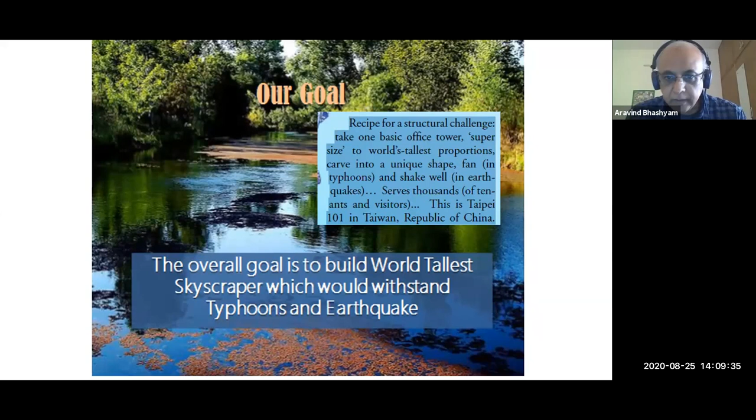So what was the goal of this, basically? If you look at it, the overall goal when we started this was that it was not supposed to be the tallest skyscraper. But over a period of time, that idea got into the people interested in building this, and so it became the world's tallest skyscraper. They also wanted a multi-level shopping mall adjoining the tower, with a lot of tower houses, hundreds of stores, restaurants, and clubs. This is basically just giving you an idea about the building.

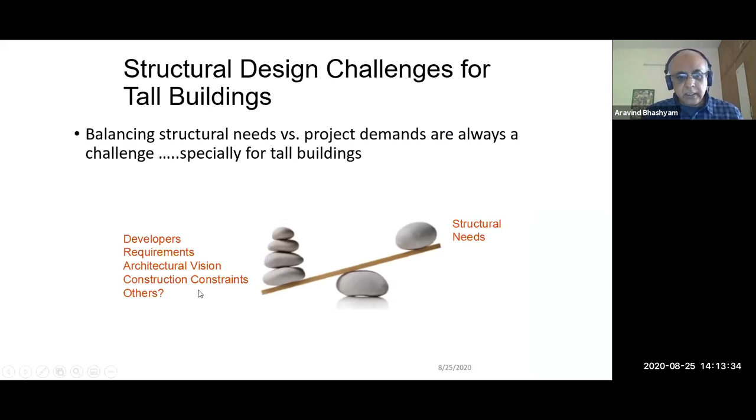Now, the challenges we face here are that you have the structural need, plus you have to meet the demand. So if you look at the developer requirements, architectural vision, construction constraints, and others, we need to balance that. How am I going to balance that? Especially when it comes to tall structures, you have the structural need on one side and the requirement on the other. How am I going to balance it?

So the challenge that you have here is the premium for height. If you have a short building, generally strength governs the design, and the gravity load is the one which is more predominant.

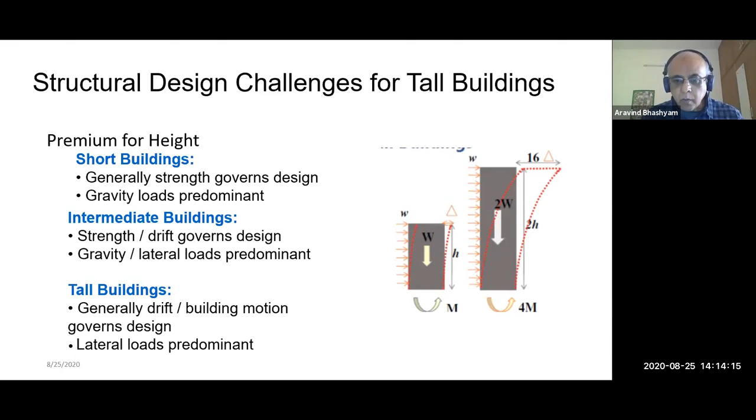For an intermediate height of building, strength and drift both govern the design. Both gravity load and lateral load become predominant. But when it comes to tall buildings, drift and building motion become very important, as does the lateral load, so we need to govern that. As the height increases, the moment at the base also increases, and so does the drift.

Now if you look at Taipei 101, here are the basic details. Architect is CY Lee and Partners, structural design done by Thornton and Tomasetti Engineers. It is steel, in-situ concrete and glass, basically a composite structure. It started in June 1998 and finished in December 2004. Total height is 508 meters, number of floors is 101, plan area 50 by 50, cost is 700 million, an office complex with a parking area.

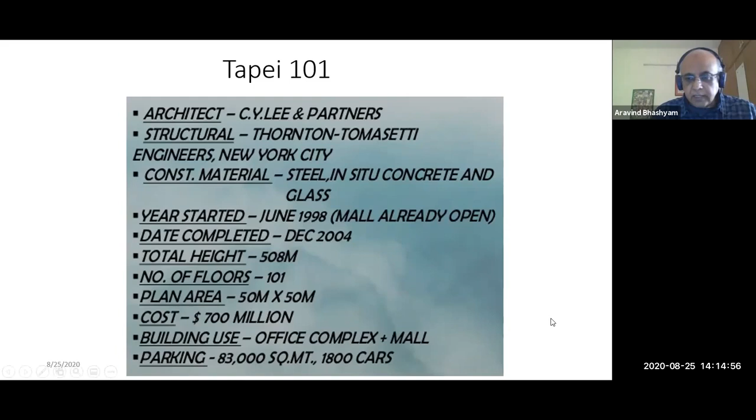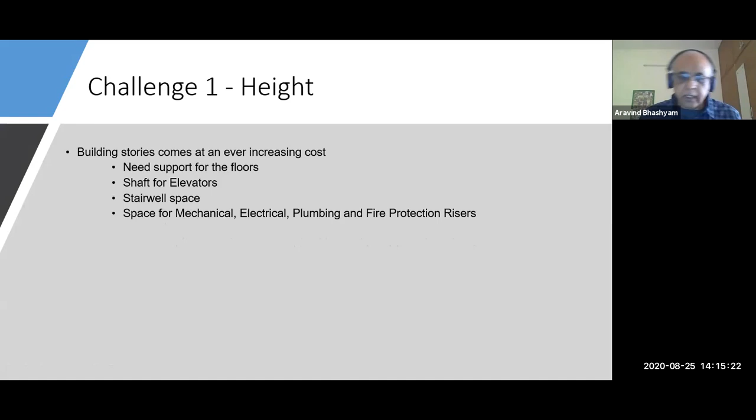The first challenge was the height. You need to find a way to support the floors, decide where to locate the shaft for the elevators and the stair space, and also find space for the mechanical, electrical, plumbing, and fire protection systems, all the MEP. When you look at economic height, the rent brought in by the added floor should be greater than the cost of the added floor.

Prior to Taipei 101, there was the 85-story T&C Tower in Kaohsiung, Taiwan, still standing, which was the tallest building on the island. They wanted to build something taller than this, a requirement from the project investors and also from the financial firm. That resulted in a jump in the height of the building, so what was originally not planned as the tallest tower became the tallest tower, with office space of 200,000 square meters based on individual area and general office layout. They also wanted a podium of the same area, 200,000 square meters, surrounding retail space, and a basement parking.

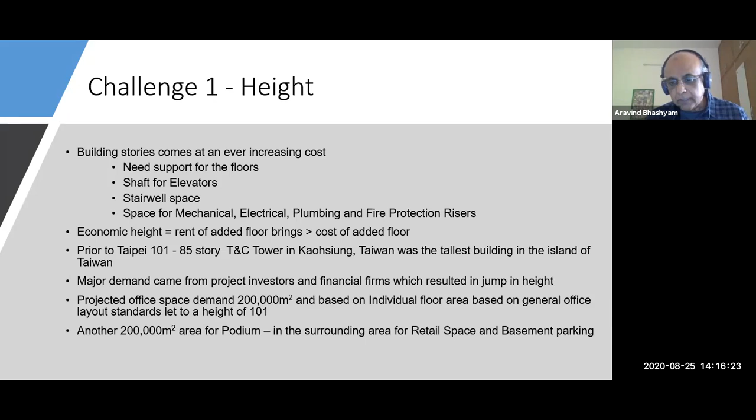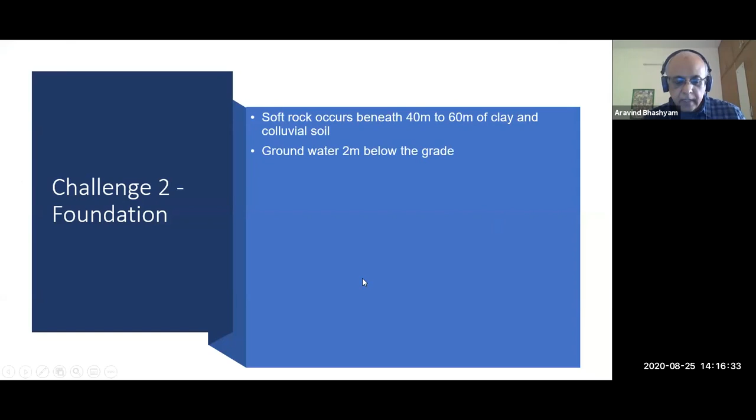The second challenge was the foundation. It's a soft rock that occurs beneath 40 to 60 meters of clay and colluvial soil. The groundwater is about 2 meters below grade. Based on extensive investigation carried out by a geotechnical firm based in Taiwan, they suggested...

...that a slurry wall 1.2 meters thick would surround both towers and the podium, about 47 meters in depth. Each podium is also based on single piles of 2 meter diameter, drilled and socketed 5 to 28 meters into the bedrock, so that it can resist the uplift pressure and buoyancy effect, because the water level is quite high there. You need that kind of dead weight on it to resist the buoyancy.

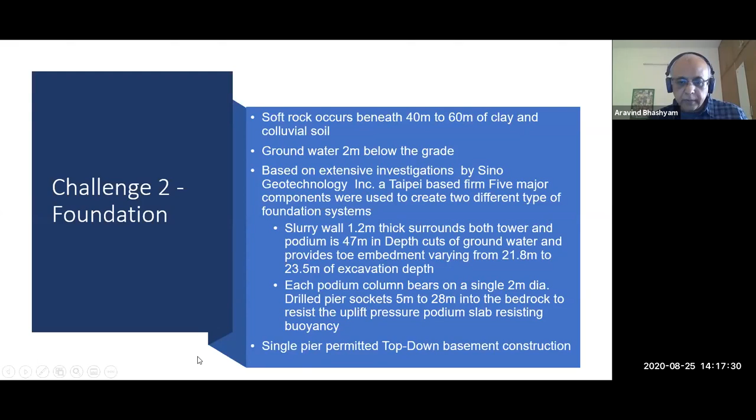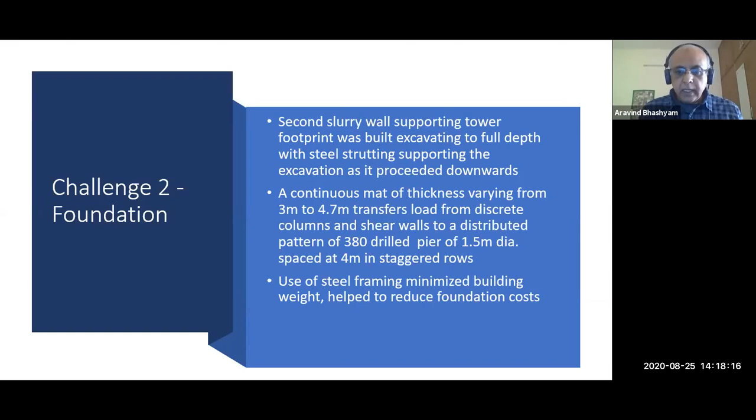We used single piers. I'll come down to the point of why we adopted top-down construction. The slurry wall that supports it was excavated to full depth with steel strutting. Basically, to retain the soil, so that when you excavate into the ground, the soil slope, which is not stable, needs some type of support - it can't stand a vertical cut. So it's all supported with the help of steel strutting, like a beam which spans between the two walls. A continuous thick mat of about 3 to 4.7 meters was used to transfer the load from the discrete columns and shear walls in a distributed pattern to the 380 drill piers. We used a steel framing system in order to minimize the weight.

Now, what is top-down construction? Usually, most cases are bottom-up: you build the foundation, and from the foundation comes the columns, beams, etc. But here it's reversed - you build everything at the top first, and from the top you go down to the bottom.

This decision of using the top-down construction all depends upon the constraints of the site and also the methodology that you feel you can adopt to deliver it much faster. So that was the reason.

So the floor was cast to brace the perimeter wall, and excavation was carried out beneath the slab to support that, and then the superstructure framing was also erected. We could do both top-down and bottom-up construction.

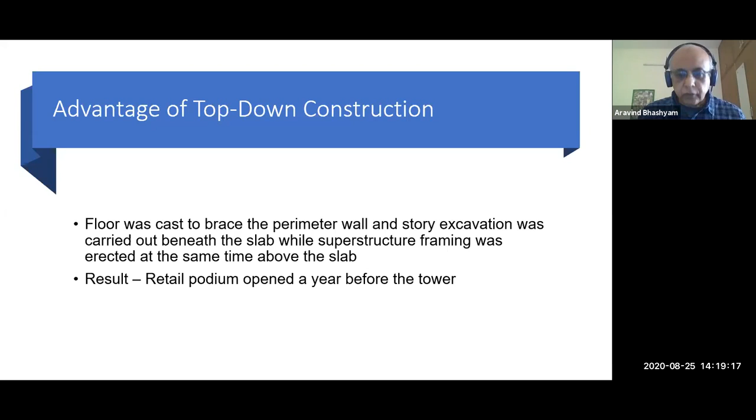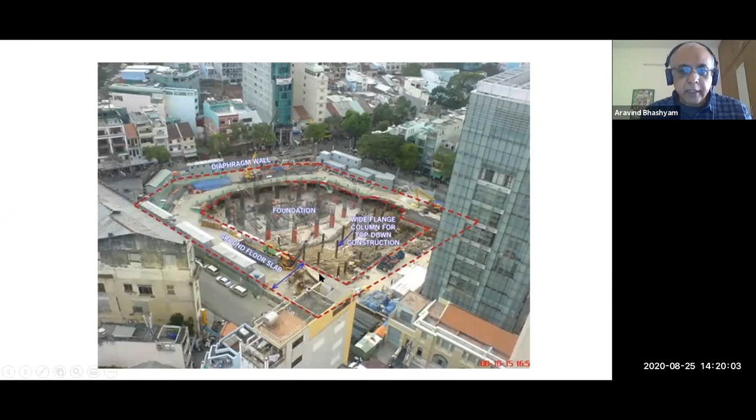Now let's see, can this go down further? Basically, this gives you an idea about the type of foundation that we have. This is a sketch of the foundation since I don't have a photograph, where you have the tower and the podium. You can see this is 380 piles of 1.5-meter diameter, and here about 167 piles of 2-meter diameter.

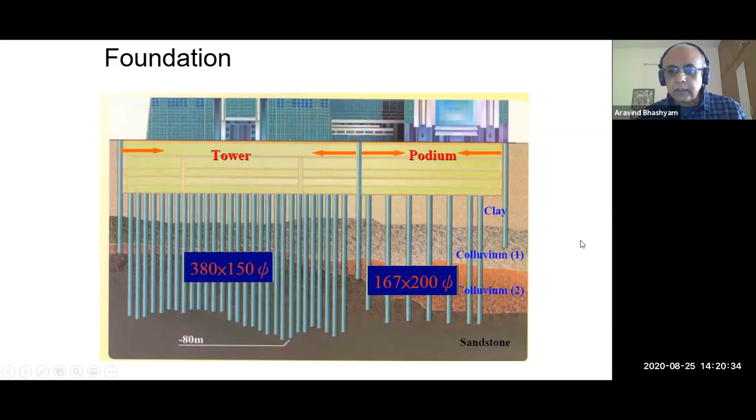We have clay, colluvium, and soil. Underneath you have sandstone, and then it is embedded into rock. This is the kind of foundation that we have, and this is the foundation plan of this whole thing.

Then next comes your tower shape. What could be the shape? Generally this is done by the architect, so the architect comes up with the shape of the building.

Initially, the Taipei 101 became a symbol of Taiwan. It has repeating modules resembling a bamboo in a way, with tiers of pagodas. Initially, that's how it was planned. Each module has a narrow base and a wider top, as if a flower is opening into the sky.

This has 8 modules because 8 is a very holy number to the Chinese, synonymous with wealth. The ninth module is the main shaft, supposed to be the architectural spire, and it has a smaller footprint comparatively. Below that, you have the repeated flare modules.

The first 25 stories are shaped as a truncated pyramid, and it provides the necessary overturning resistance and lateral stiffness compared to a straight shaft. That's the reason why you have that, and it engages the perimeter column.

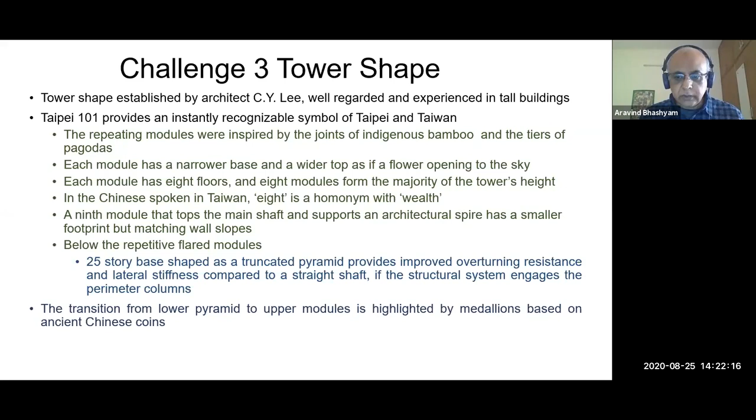Then you have this transition from the lower pyramid to the upper module, highlighted by the medallion based on the Chinese coins.

Now this was the original configuration that we had, like a pagoda placed one above the other, with 8 modules. Now look at the bamboo, how it has a node which expands here—these are the connectivity windows. So the natural formation of bamboo reveals that it has certain unique structural characteristics.

Probably you would have listened to Dr. Jagadish Vengala's lecture on bamboo. This is exactly what it does—it has a long, narrow bamboo stem that provides support for large foliage, and it provides predictable support.

So we looked at it and got an idea—why can't it be like a bamboo? So even when these things are subjected to tsunamis or typhoons, they're able to bear the lateral load efficiently. That's the beauty of this. And the geometric proportions of it are also very nice, so we can take a lot of things from the bamboo.

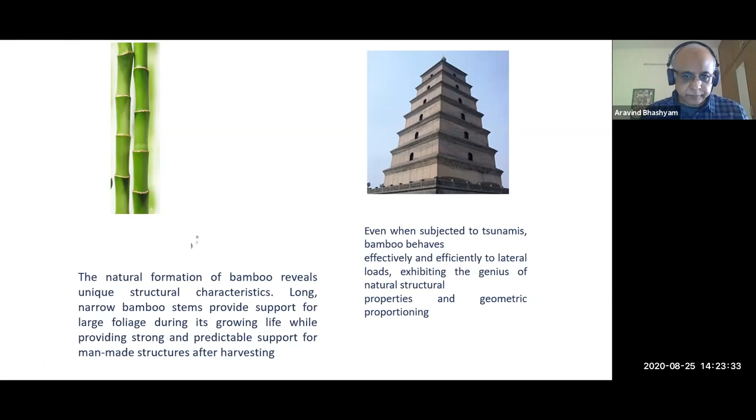So now if you look at Taipei 101, it exactly replicates this kind of feature that you find in a bamboo. Now let's see what this means.

Now if you look at the wind force, that dominating lateral force, you have it in three mutual directions. One on the upward axis is called yawing, that is the lift. Second is the pitching, and third the rolling. These are the three rotations about the three axes that you have.

Now for civil engineering structures, the moment corresponding to the vertical axis—the lift and yawing moment—are of little significance. We need to look at pitching and rolling. Therefore, the flow of wind is considered two-dimensional, along-wind and across-wind, called the along-wind response and the transverse wind response.

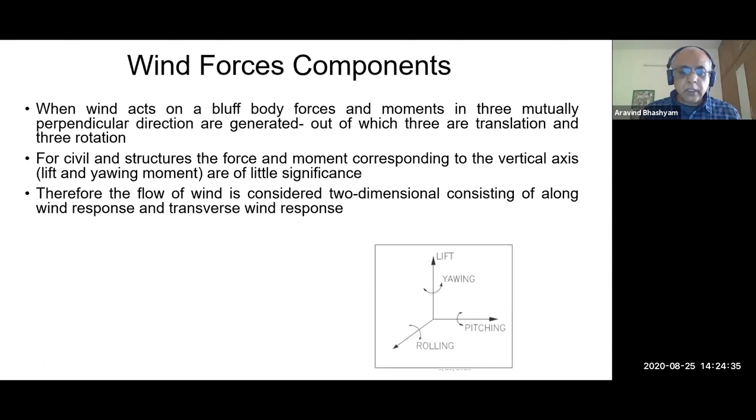So this is exactly where you find the drag force, and the transverse wind is used to describe the crosswind. If you look at the effect of wind on the structure, it has static, dynamic, and aerodynamic effects. We are more interested in the dynamic response of the wind, which is dynamic as well as aerodynamic effect, that should be analyzed in addition to the static wind force.

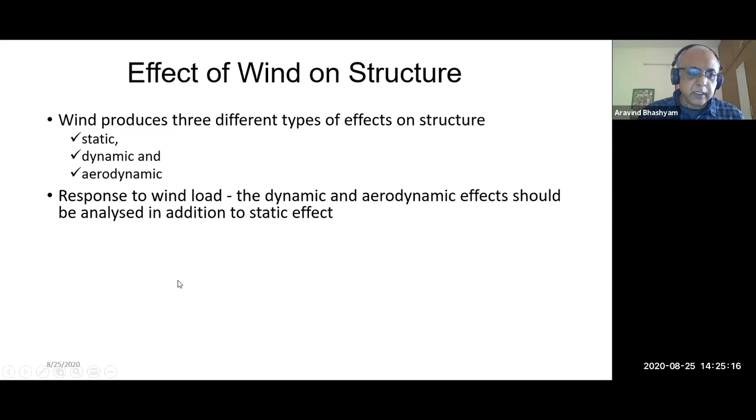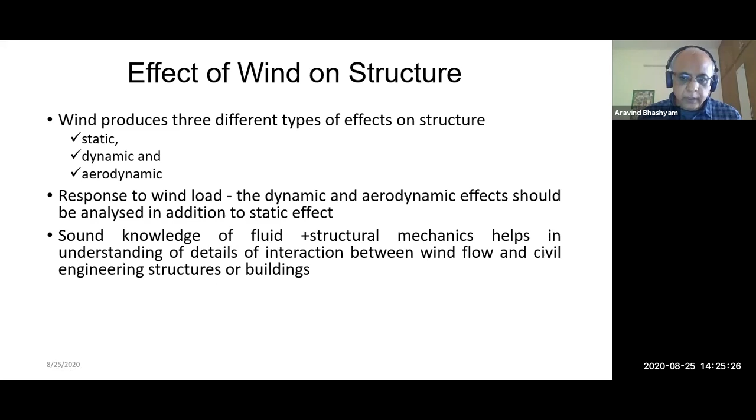In most cases, we treat wind as a static force, which is okay for a small or medium sized building. But when it comes to tall structures, we necessarily have to look into the dynamic and aerodynamic effects. Here we require the knowledge of fluid as well as structural mechanics in order to understand the interaction between the wind flow and civil engineering structures or buildings.

Now if you look at the wind diagram, this is generally what you see in the code, which gives you an exponential profile of the wind. What you see here in the red line is the fluctuating part of the wind, this is called a gust. And this line represents your static load, which again is a function of your wind velocity.

As the building gets taller, the wind-induced dynamic force becomes more predominant and starts dictating your design. So this fluctuating wind is the one which causes the dynamic loads on the building. We have both low frequency and resonant components that we have to look into, to see that the building doesn't get into resonance.

We have both yawing and pitching moment on this, and you have to design the building for that. Now you can look at A and B. The A component is the static load, B is the low frequency background.

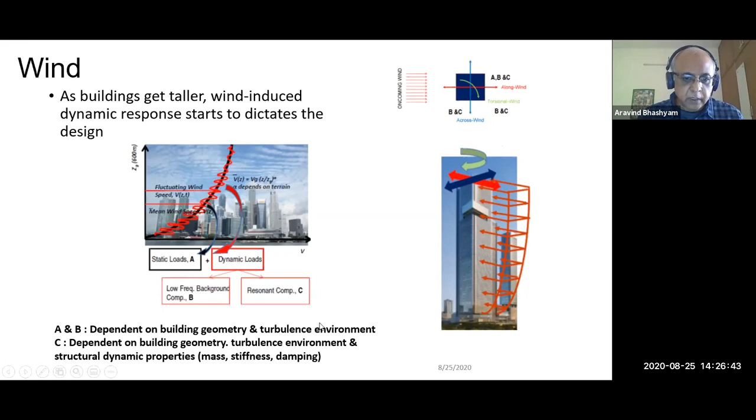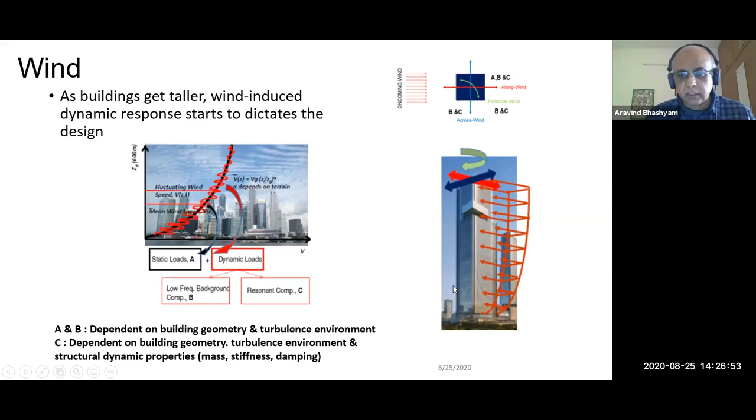A and B are dependent on the building geometry and the turbulence of the environment. But C is dependent on the building geometry, turbulence, and also the dynamic properties, that is the mass, stiffness, and damping of the structure, that is the material that you have used in the structure.

So how do I get the dynamic component? What causes that? Essentially, it is caused by the gust. The gust is a sudden brief increase in the speed of the wind, and then suddenly there is a lull. So it can reach a peak and go beyond.

That means it varies from place to place, where you can always measure the gust speed and see that it varies. Maybe your wind speed may be at least 18 miles per hour, that is the gust speed. After the lull, the wind may become 10 miles per hour. So you can see the fluctuation of the wind.

Now, I'm not getting into the point of how the gusts are generated. It can be caused either by turbulence due to friction, wind shear, solar heating of the ground, and various other aspects. If you want to know more about it, you can get into wind engineering.

Now there's another component called vortex shedding, which you can see many of you have seen in a coconut tree swaying in the wind. That's because of vortex shedding, that's what causes the oscillation that takes place due to the airflow around it, because it goes past a bluff body.

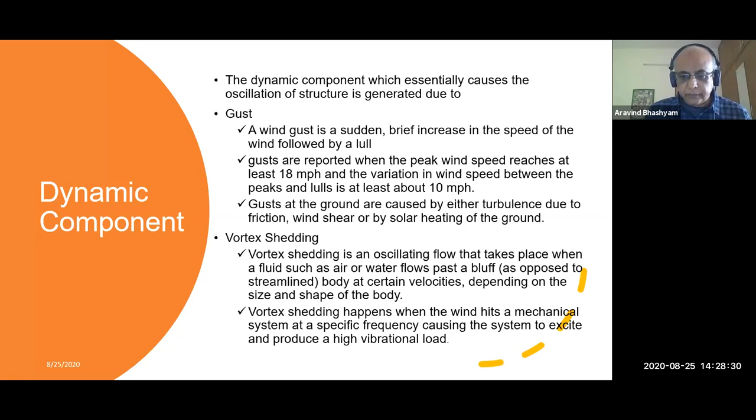Most of our civil engineering structures are bluff bodies, and most of the aerodynamic ones, like aircraft and other things, are streamlined. So here, as the vortex shedding happens, it creates a mechanical system that has got a specific frequency which can excite and produce high vibrational load. So what you see here is the vortex shedding. You heard about the von Karman vortex street, so basically that's what it comes from.

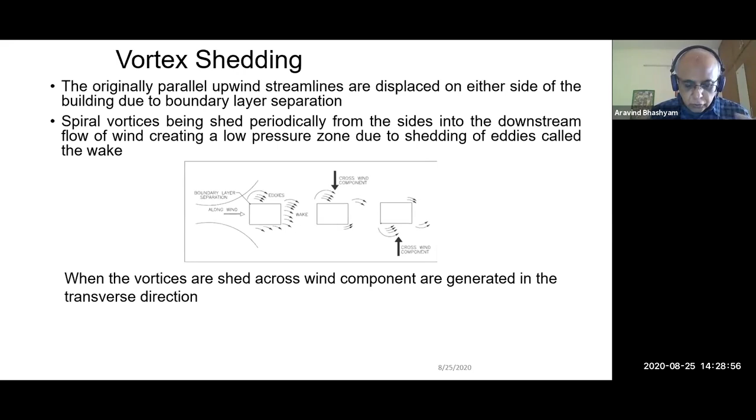So what happens is the upwind, before reaching the structure, gets displaced on either side of the building due to boundary layer separation. Now this goes into a spiral, it sheds periodically on either side of it, on the downstream side as it goes through. And these wind components that are generated create a component that is transverse to the structure.

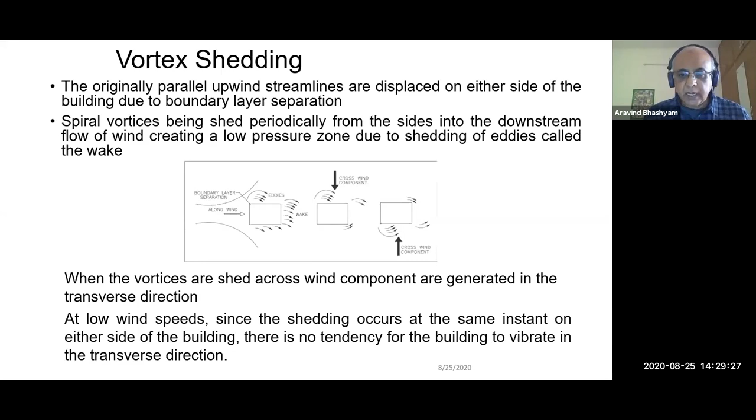Since the shedding occurs at the same instant on either side of the building, there is no tendency for the building to vibrate in the transverse direction, but it need not be the case. It can differ. So how do you counter the wind?

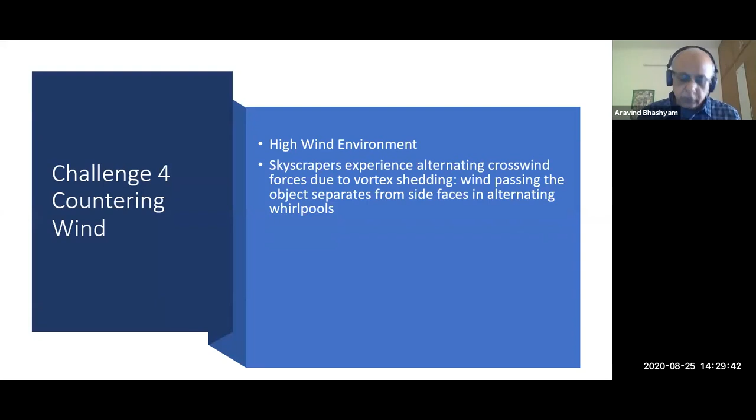You have high wind. Skyscrapers will experience alternating crosswind forces due to vortex shedding and alternating whirlpools. Taiwan, being a place where you can expect a typhoon, brings in a wind speed of almost 43.3 meters per second or 97 miles per hour, averaged over 10 minutes at a height of 10 meters. This is similar to a 3-second gust of 67 meters per second, or 150 miles per hour. It can excite a skyscraper with a crosswind much greater than those normally used for design.

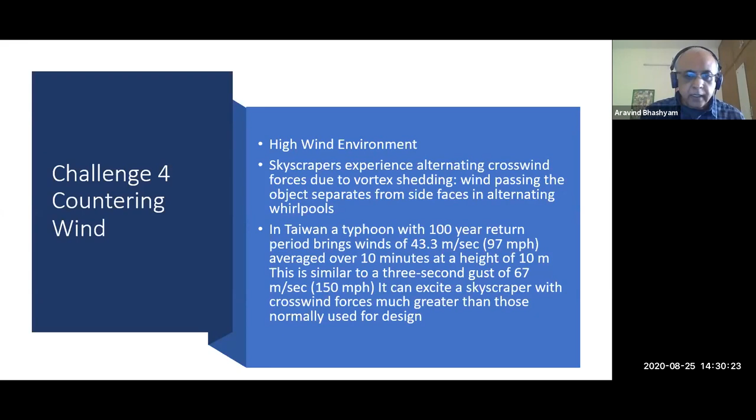So you need to look at how we can counter this wind, how we can make the structure resist these kinds of wind, and what approaches are available to minimize this crosswind.

We have a number of approaches to minimize crosswind. One is orientation, then a setback of varying cross-sections, which is what is done in Burj Dubai. You can also twist the building, or induce porosity—allow the wind to pass through so it doesn't excite it so much. These are not the only ones that can be done.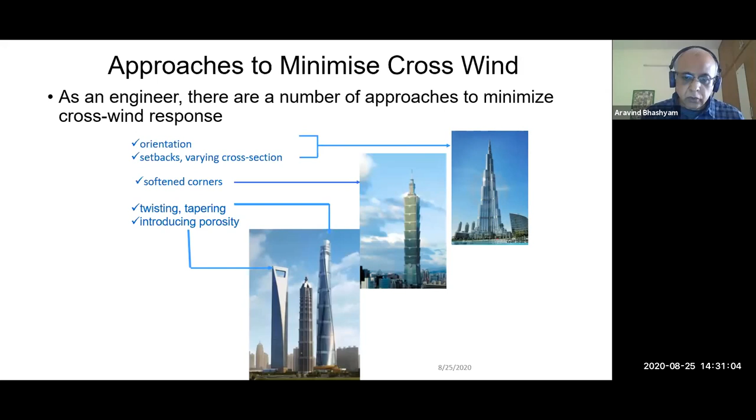The third one, used in Taipei, is softened corners. The corners get softened, and as a result I can control the response. We'll see what happens.

Now, what we have arrived at is a shape. In most cases the architects arrive at a shape, but that is not final. It has to undergo a wind tunnel test because sharp corners can create large crosswind excitation, and you have to find a way to reduce that response, either with a sawtooth or a notch corner, etc.

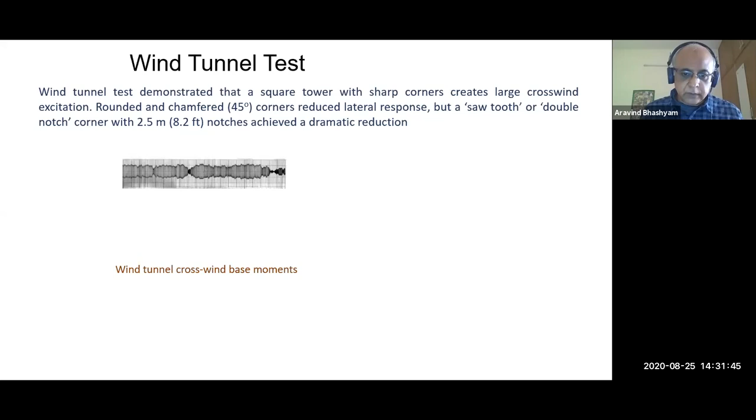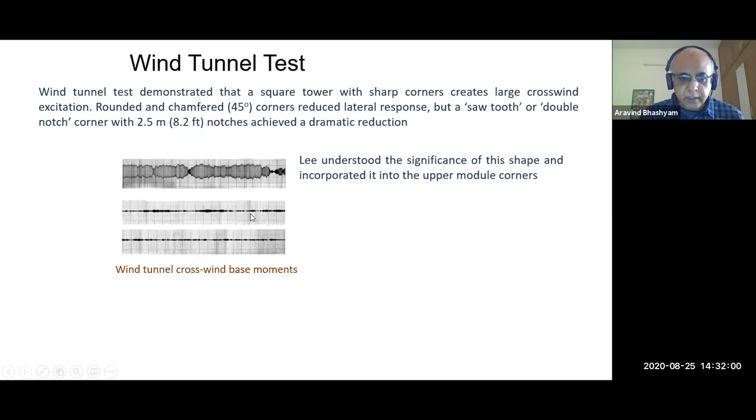So one way of doing that is the wind tunnel test. Now this was the moment that you get. Let's see the high moment you got with the initial shape of the building, like a pagoda—that is the module of that. Subsequently, when you understood the shape needs to be altered, meaning you soften the corner, the moment got reduced considerably, and so we got the final shape.

Now you can see here, this is the way you soften the corners. It goes around like this—this is the module that you have. So this is the corner that has been softened around, so as the wind flows through, the moment at the base reduces drastically because you're confusing the vortex around it, so it sheds away and doesn't cause this effect.

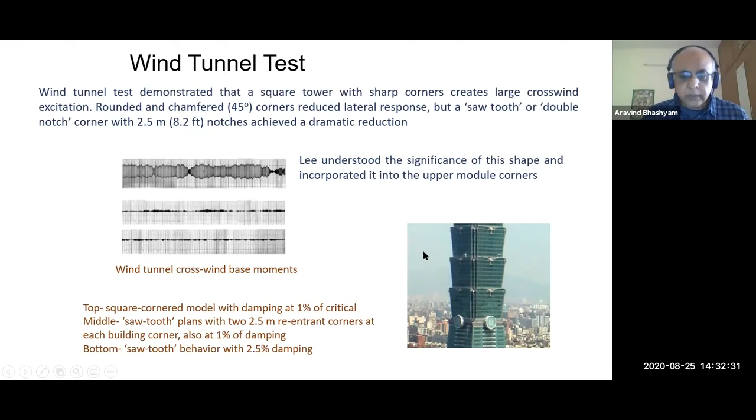Also, you need additional damping that needs to be done, so we'll see what things are required. This is basically a wind tunnel test—RWDI did the wind tunnel test for them. And this is the various mode shapes of the building that you have. It's also very useful for this.

Another important aspect we need to look at while carrying out the wind tunnel test is to see that the upper floors do not accelerate due to the wind. A certain amount of damping would be required for this, with and without typhoon. Because of the acceleration of the higher floors, people living there will experience a lot of discomfort—they feel the building is shaking and get nervous about everything.

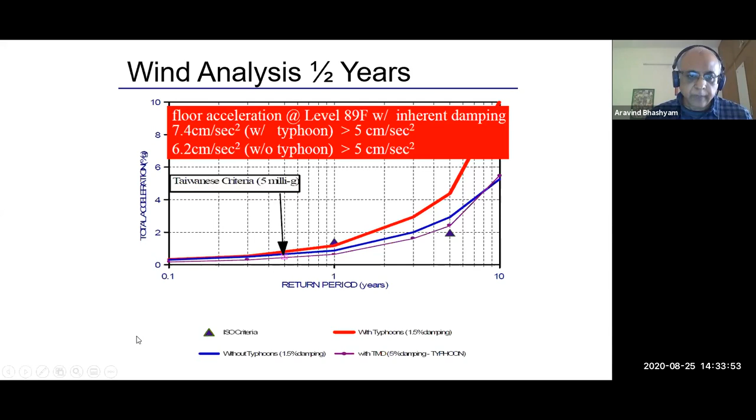So that's one thing we need to eliminate—we have to make sure the building does not accelerate beyond the specified limit. That also needs a codal provision based on study of what the acceleration level should be at a higher floor. We have used the Taiwanese criteria of 5 milli-g here. This is the level to which it is designed, and based on the return period, we have with and without typhoon values. Now this is the wind analysis showing how the moment reduces, so now we have two design criteria.

As I told you earlier, this particular place is subjected to both typhoon and seismic load. So we need to incorporate both, but both have a different design criteria. In order to counter the wind, I need weight, but if I increase the weight, I'm increasing the seismic load. So now I have to come to a balance.

Now, if you look at human comfort as you go higher up, for a half-year return period of 14 meters per second, the acceleration should be less than 5 centimeters per second square. For a 50-year return period, we calculate a drift ratio of 5 by 1000. We also check various factors for a 100-year return period. What could be the stress check? That is the factored load.

Same way for the seismic load, it has to remain elastic at 0.13 G, and we also looked at a 950-year return period where we retain the stability of the structure at 0.39 G. We'll see a little later how this helped us arrive at the design criteria.

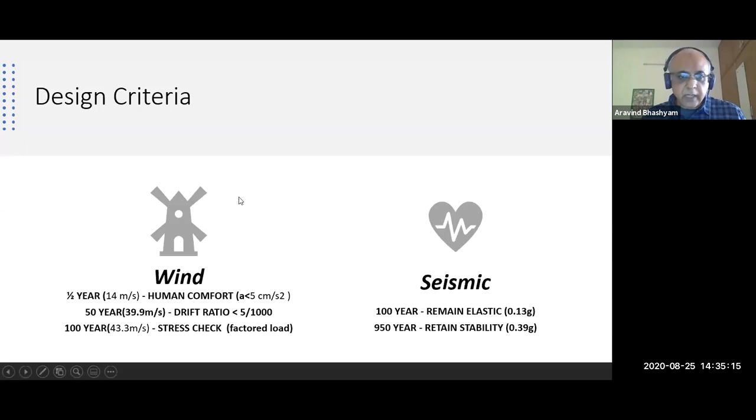Next is the structural system. For a tall structure, if you look at the work of Fazlur Khan, he has done extensive work in the area of tall structures. He has arrived at different configurations of structure depending on number of stories, height, etc. So you have a lot of alternatives which we can look into.

One is a framed tube, that is closely spaced perimeter columns joined by deep, stiff perimeter beams, spandrel beams, forming a rigid box-like structure. This was ruled out because of certain architectural features: the wide glass expanses desired by the owner indirectly transfer load to the setback at the top of each module, and the intrusive internal beam connecting the building frame has a sawtooth corner, which can cause an increase in wind moment at the base.

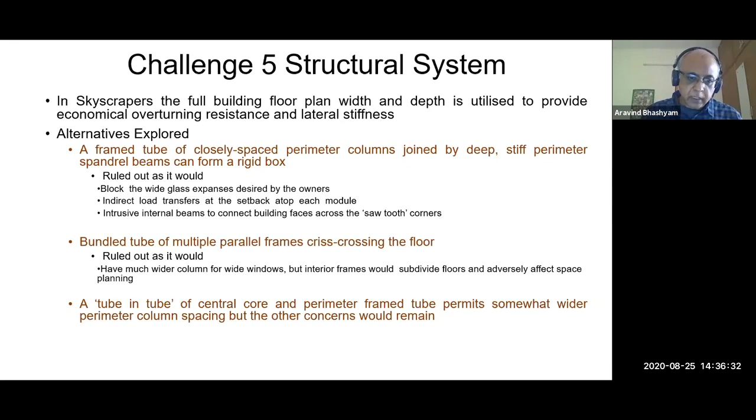The other option was a bundled tube of multiple parallel frames crisscrossing each other. This was also ruled out as it has much wider columns for wide windows. Interior frames would subdivide the floors and could also adversely affect space planning. Tube-in-tube with a central core etc. was also looked into.

The first step in the design methodology is to take the aerodynamic effect modification for a tall building in order to reduce the wind effect. That's where the architectural feature also comes into play. Second is to enhance the impact of the structural system, reducing the response of the tall building to wind, both statically and dynamically, as well as the aerodynamic effect. All these things have to be considered, and they are interrelated too.

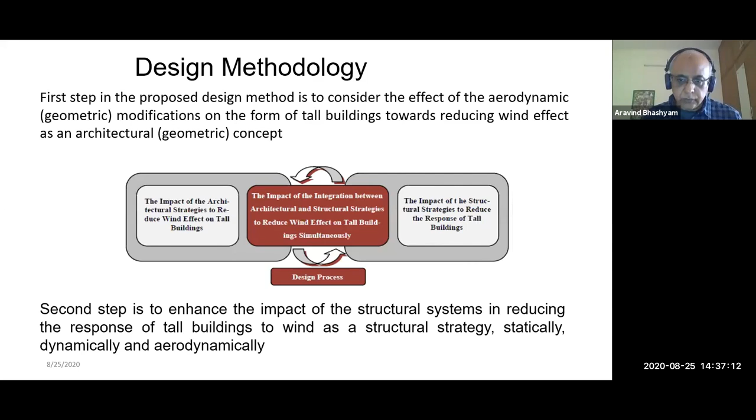So the structural system that was adopted was a central braced core connected by several perimeter columns on each building face, with outrigger trusses with top and bottom chords incorporated within the framing of two adjacent floors — it runs from one floor to the other. This is what is called the mega frame. The outrigger trusses and outrigger columns basically help to stabilize the narrow core that you have.

Now the belt truss that you have at each module, you can see the shape is narrow, then it widens up like a flower opening into the sky — so you have a setback. So we have to gather the perimeter weight with two outrigger super columns. I'll come to the point of what a super column is. On each face, so the member sizes, you have to account for the gravity load and need the axial stiffness as well.

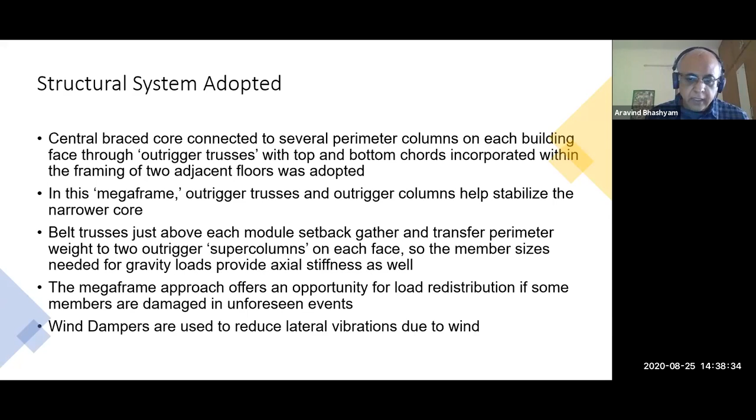The provision of the mega frame gives an opportunity for load redistribution in some members, and it may help with damage from certain unforeseen events. Finally, we decided that wind dampers would be used to reduce lateral vibrations due to wind. Again, it's all based on your wind tunnel test.

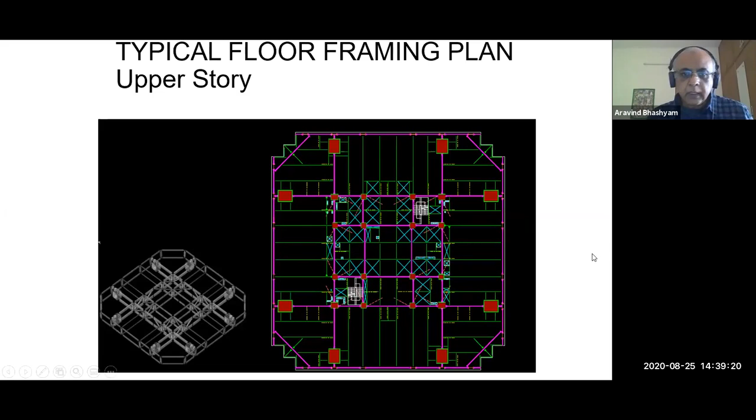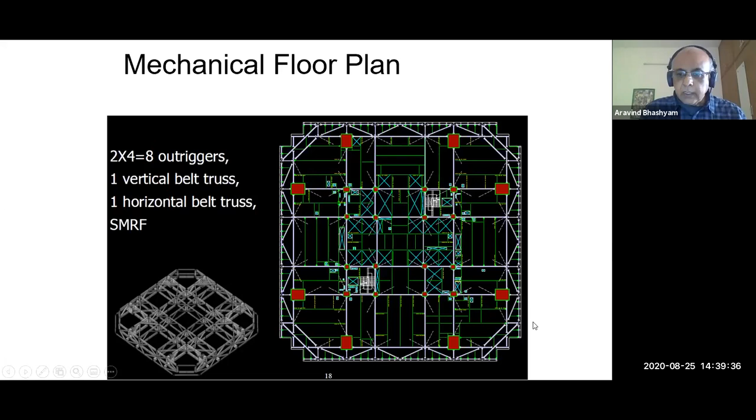Then how to improve the lateral system stiffness, that's what we want. So in order to prevent damages to the facades and the partitions, the requirement was that the drift should be H by 200 for a 50 year storm. Now, a large portion of the drift is created by the overturning rotation at the lower stories, and drift control required increased column stiffness.

So what we did was the hollow columns were filled with high strength concrete. They were adopted as a core for the super column. We'll soon see the sketch of the super column, you'll get an idea about it. Now, the super columns are the boxes that go up to level 90.

They are made of steel plates, specially made steel plates of 50 to 80 mm thick, and we have used full penetration weld splices. You have the box strap to resist the bulging, and the rebar strengthens the concrete, and you have also used shear studs to link concrete and the steel, basically to transfer the forces. And the core box of the super column is filled with 69,000 kPa concrete, where the extra stiffness is needed from the bottom of the basement to level 62.

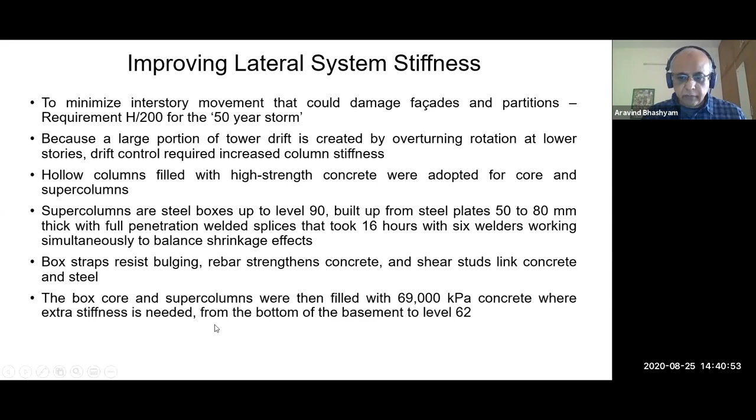This is the super column. What you see here are the stiffeners for the super plate. Now you have the reinforcement coming out from these holes that are done. So you can see that this is basically a hollow column, but we needed extra stiffness for that in order to reduce the drift. That's the reason why it's filled with high strength concrete, and it also has reinforcement coming up from it. In addition, it also has shear connectors into this.

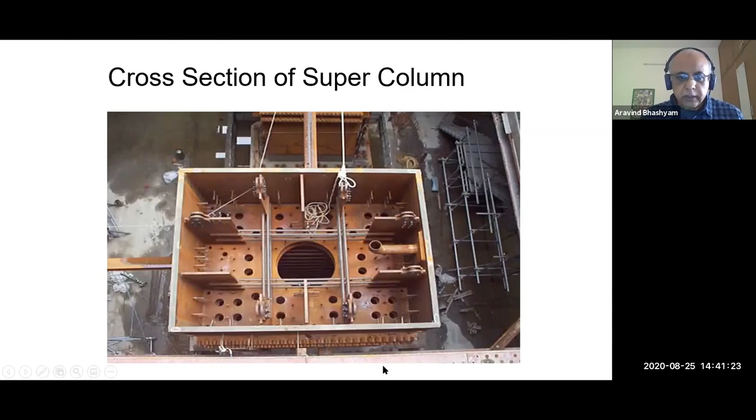So you can get an idea of the size of the super column that you have. You can see this is the height of an average man, about 5 feet 6 inches to 5 feet 7 inches, and about this much space is left here. So you can imagine the size of this column. And this is how it is fabricated at the site, then transferred to the location where we have it.

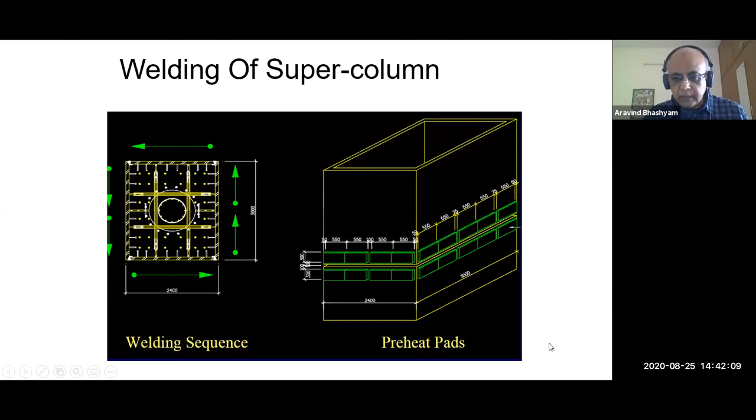So the size of the column is 2.4 by 3 by 80 mm, and you have 70 MPa high strength concrete inside that. Now this is the sequence of welding that we have, because we don't want the steel to warp because of the heat. So that's why we have to have the sequence of welding, which is very important in this case.

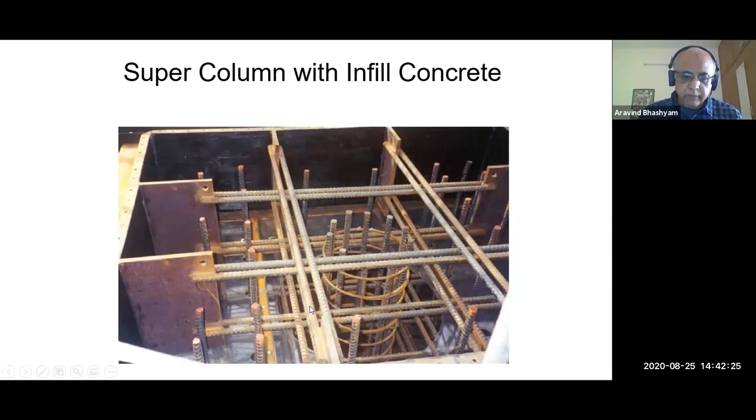This is how you have the super column filled with infill concrete. You can see here how the reinforcements are being placed. This is the spiral column which comes out of this circular column, and you have this reinforcement passing through.

The next important criteria is the seismic design. Now, seismic design philosophy focuses on safety rather than comfort. We don't want the building to collapse, that is the safety, we don't want any life to be lost in this. So the basic philosophy is that in minor shaking, there should not be any damage to the building.

In moderate shaking, there can be no severe structural damage, but there can be damage to the non-structural elements. But at the maximum design level, there can be certain structural damage, but it should not collapse. That's the most important thing.

So it may start shaking once it experiences the ground motion here, and this whole thing starts shaking. Now, basically what happens in case of an earthquake is that it starts shaking the building. It's not a force actually, it's a displacement given to the building. That's what happens here.

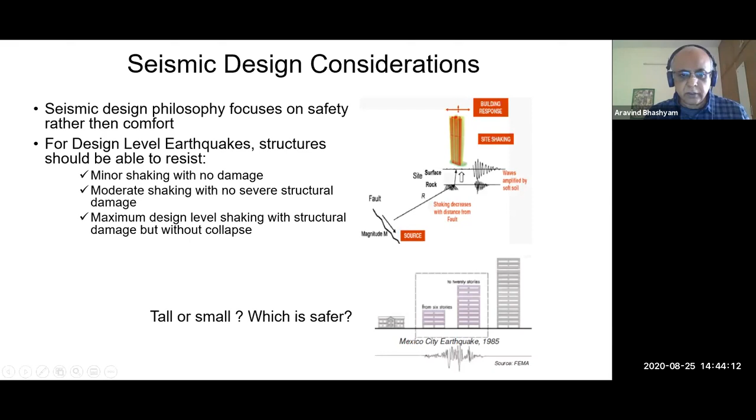The criteria is that the structural system should be stiff enough to resist the wind, to limit the wind drift, but it should not overload the behavior desired for seismic ductility. We need ductile behavior for the seismic design. So you design for the stiffness required for the wind, then check for the seismic ductility and the seismic strength.

One thing you can do is use an eccentrically braced frame, which has performed very well in seismic zones. That could be one way, where you have the web shear control the beam flexure. But you can't just do it like that, as it can induce undesirable flexibility for wind conditions.

You can have an open link portion of the beam strengthened by side plates to maintain the stiffness and ensure that the link is not the controlling strength across the eccentric links. That means in the eccentric frame, the links serve as a fuse in case of a seismic event.

Like an electrical fuse, when there's a spike in current, the fuse blows off, protecting the remaining circuit. Same thing happens in an eccentrically braced frame: the link just blows out, meaning it gets damaged and protects the remaining structure. That link absorbs the seismic energy given to it.

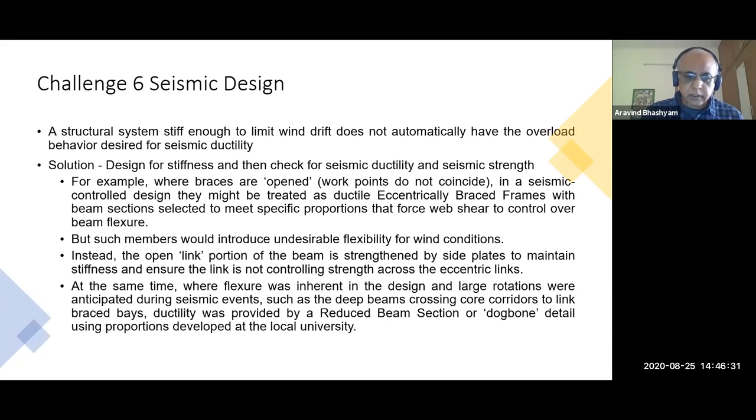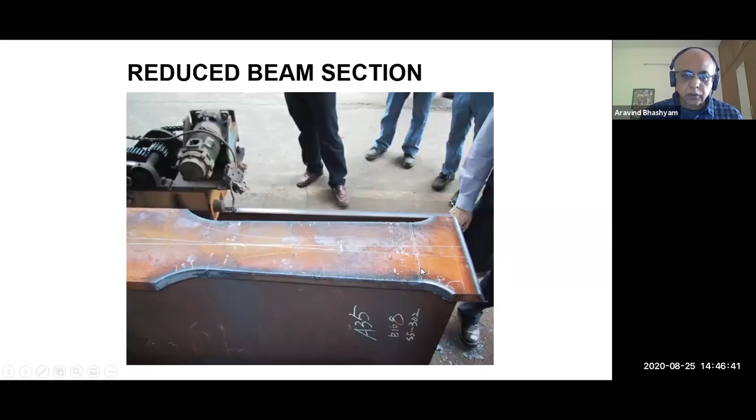The next important aspect is occupant comfort, where we try to increase the stiffness to meet the wind requirement. At the same time, we must ensure we are not overdoing it, because we need ductile behavior for the seismic load. So everything has to be looked into.

We had a low inherent damping of 1% of critical in a moderate windstorm. If you don't have any external or additional damping built in, people living here can experience an uncomfortable level of acceleration. So damping is absolutely necessary to absorb this extra energy induced by wind movement.

Seeing that it is close to the fault plane, about 200 meters from it, it's also prone to fierce wind and earthquake. What is the criteria, what can we do here? It has to withstand strong wind, yet remain rigid at the same time so that it can prevent large sideways movement.

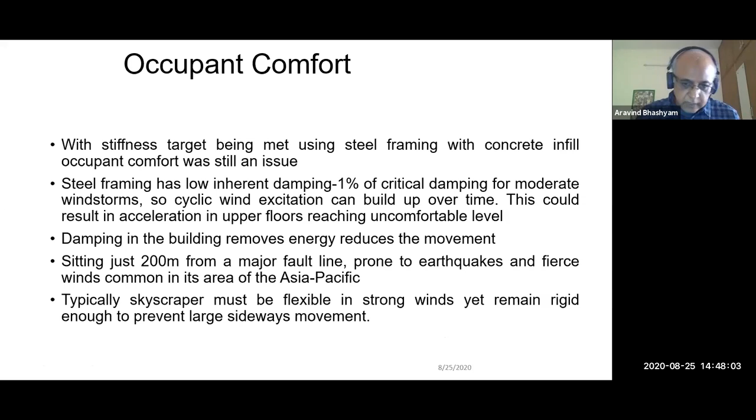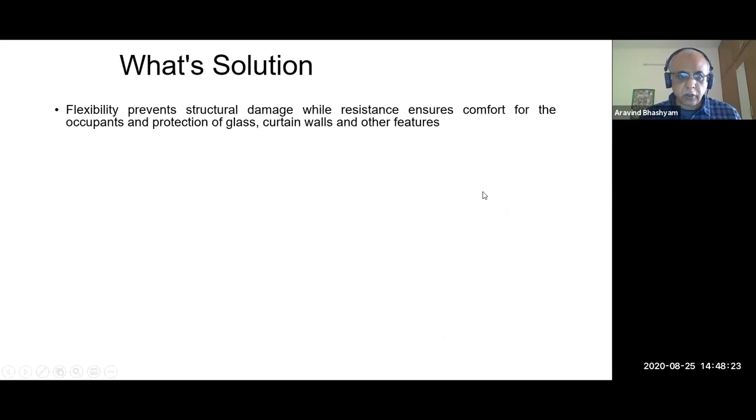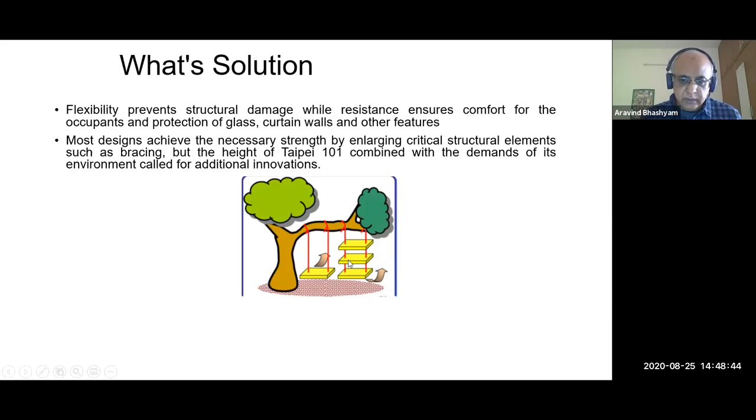This is a simple example. If the loads are not balanced here, this can twist, the swing can twist, but this can move in a straight way, which is what is required here. So you have to lessen the impact of the violent motion.

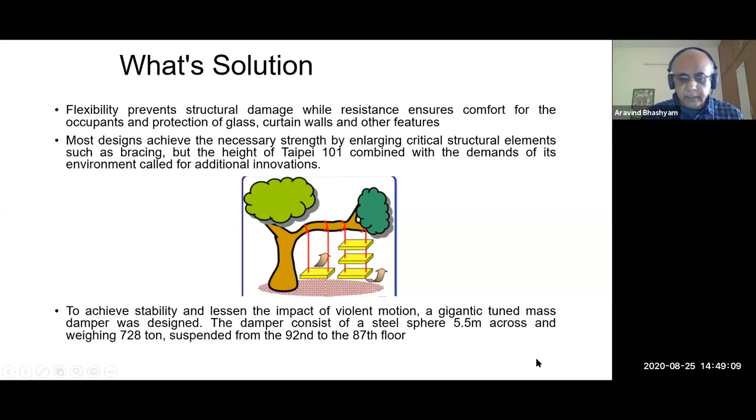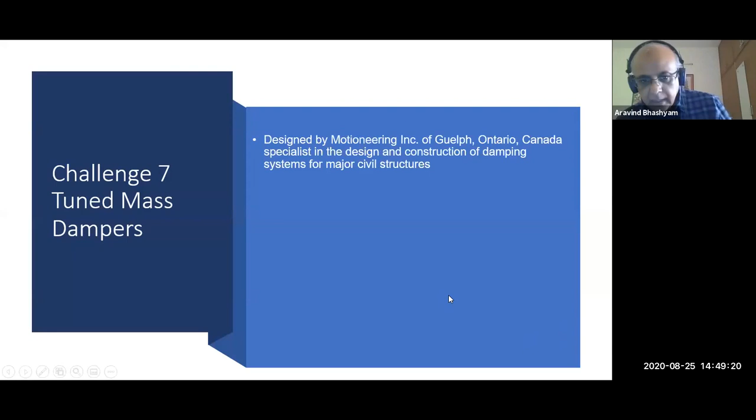For that, we chose a gigantic tuned mass damper. The damper chosen is a steel sphere of 5.5 meters in diameter, weighing about 728 tons, suspended from the 92nd to 87th floor. This design is a specialist design, done entirely by Motioneering, so that this tuned mass damper helps absorb the energy in case of a typhoon or an earthquake.

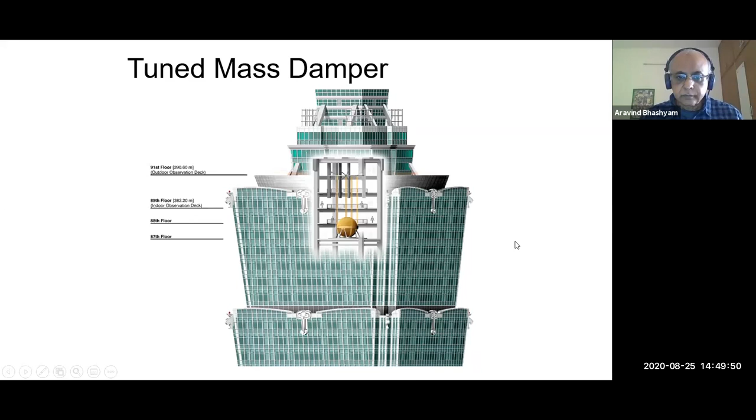So it is suspended by steel cables, slung to the support. It has 8 viscous dampers in addition to that. It can move 1.53 meters in any direction and reduce the sideways movement by 40%.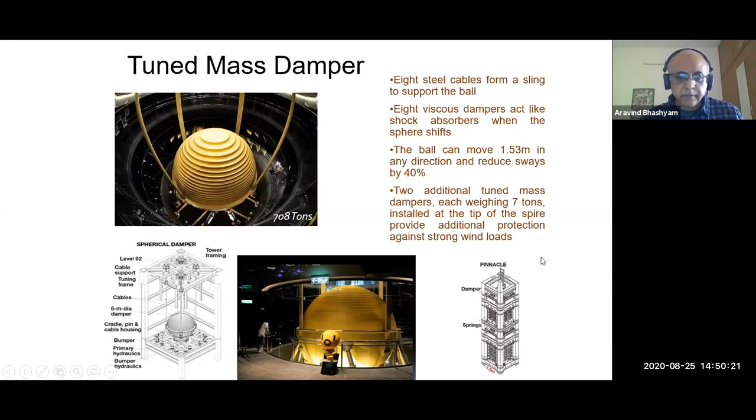In addition, we have 2 additional tuned mass dampers, each weighing 7 tons, installed at the tip of the spire, that also provide protection against strong winds. This is the construction of the tuned mass damper.

Next is the fatigue because of the alternating effect of it. So in order to take care of it, we need some kind of damper here. That's what we saw, that the damper does both things. So we had 3 mode shapes identified that could potentially create significant stress ranges during the storm, so we needed an additional damper for this condition in order to improve the fatigue life of the spire.

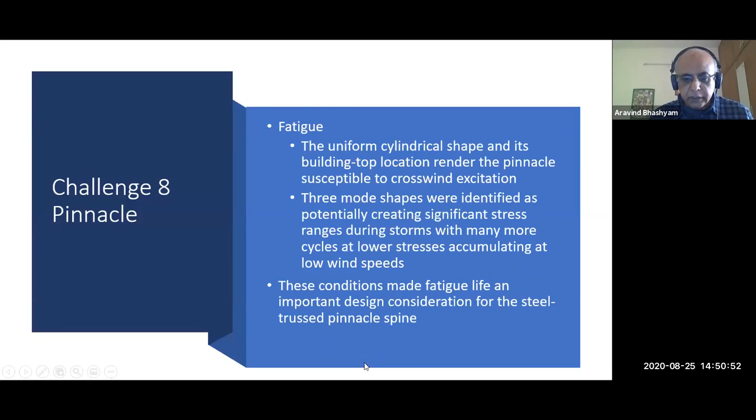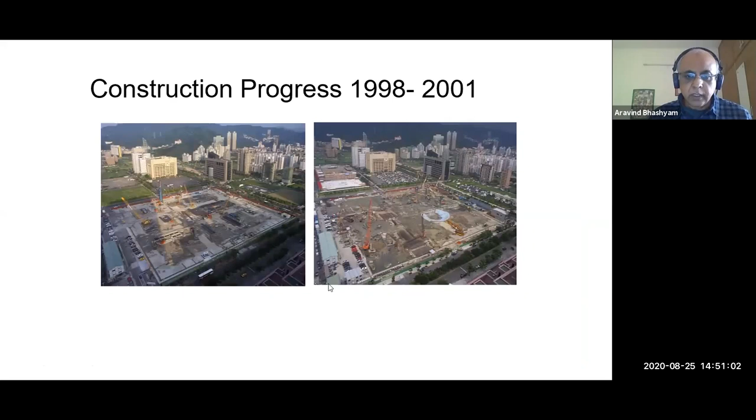So this was a construction that was in progress from 1998 to 2001. You can see that the whole thing is being done. And in the year 2002, on 31st of March, a major earthquake hit this.

Now let's see what happened to the building. For a minute, I'll stop sharing. I'll open up the video.

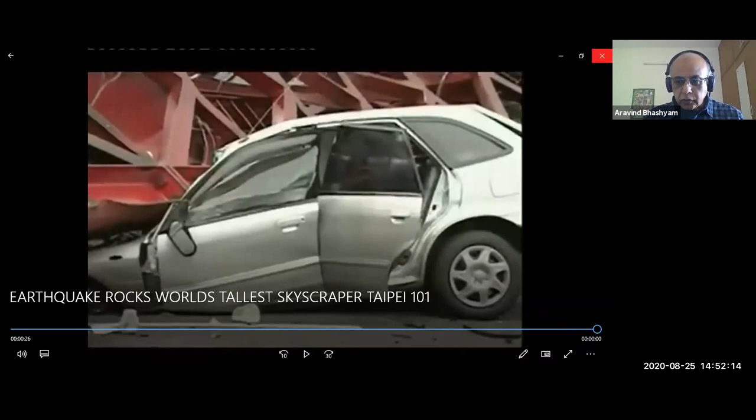So when the earthquake hit that building, the top, the 2 cranes that were mounted at the top, they were not fixed to the base of the building, so they collapsed. That's what you can see.

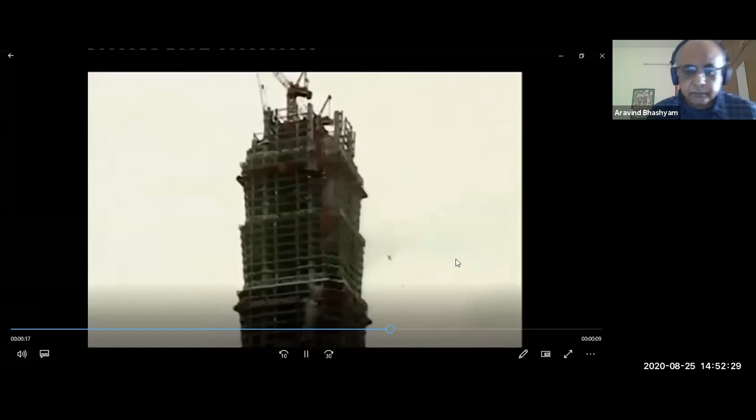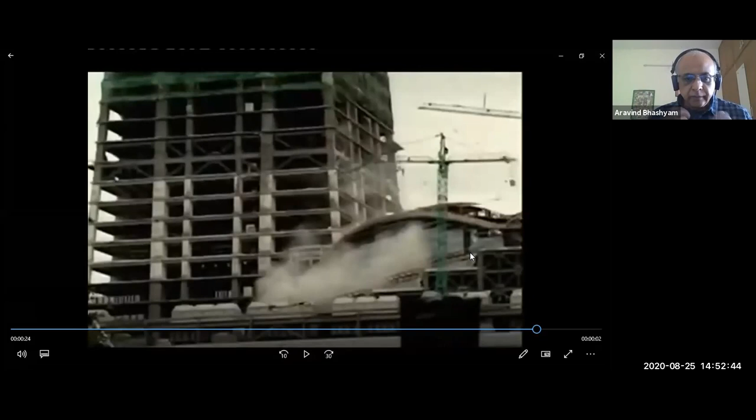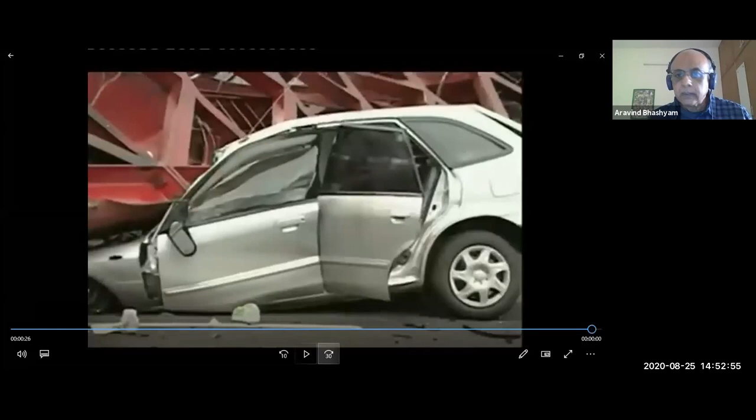Now if you look through the building, it looked like as if nothing has happened to the building. If you really see this, it looks like the building had withstood the earthquake, given the magnitude of the earthquake.

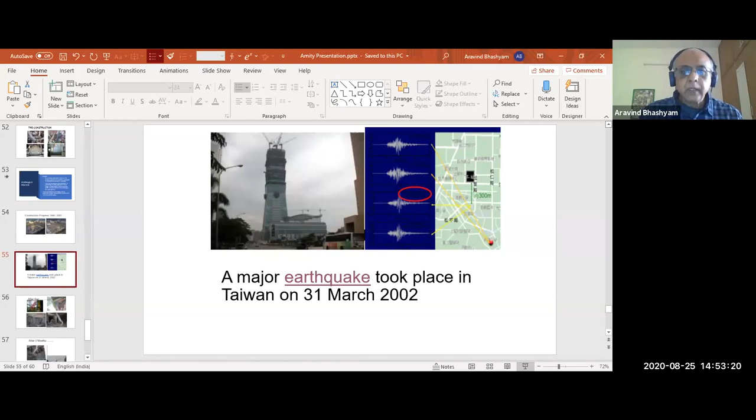So now you can see that the building was able to withstand the earthquake, but there was certain damage to certain sections of the beams and the bracing system that was adopted here.

So after a period of 3 months, everything was inspected, and they found that nothing else was wrong with it, so we could go ahead with the construction.

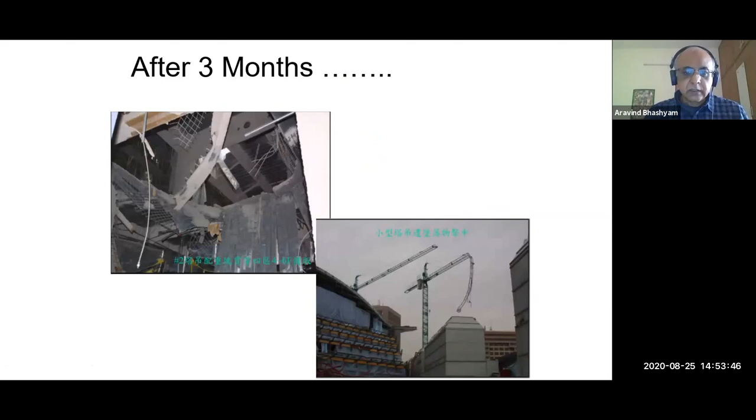We proceeded with the construction, and in 2004 the building was inaugurated. This was the formal opening of the building. This is in 2003 - earlier it was his first term as Taipei mayor, and he wanted to have this achievement.

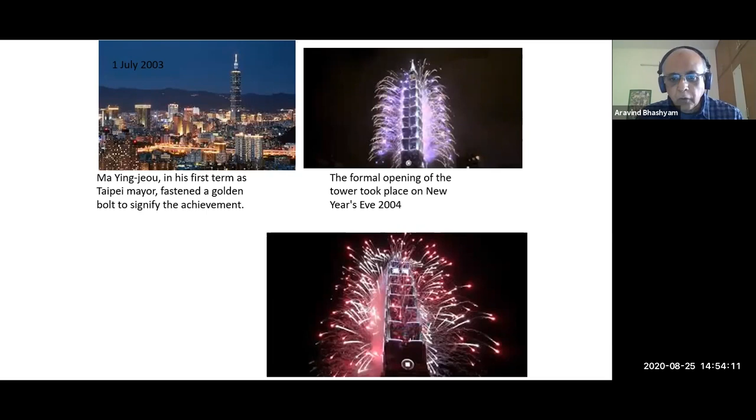So they had a kind of celebration, but the formal opening took place on the eve of the new year of 2004. An earthquake hit Taipei 101, and there was also a typhoon.

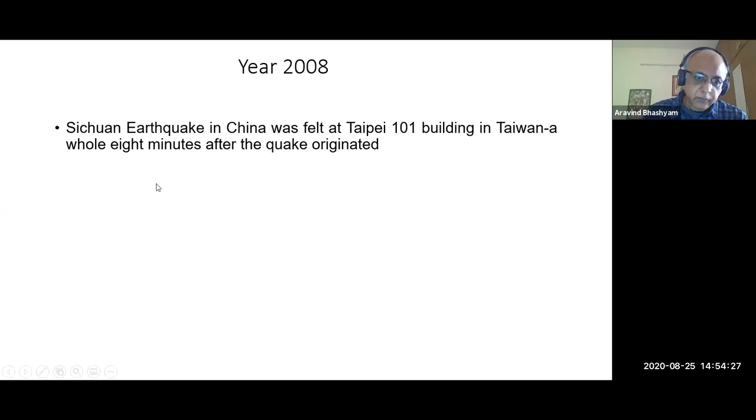Now you can see how the damper works to resist that.

You can see the damper movement here. That huge ball is swinging.

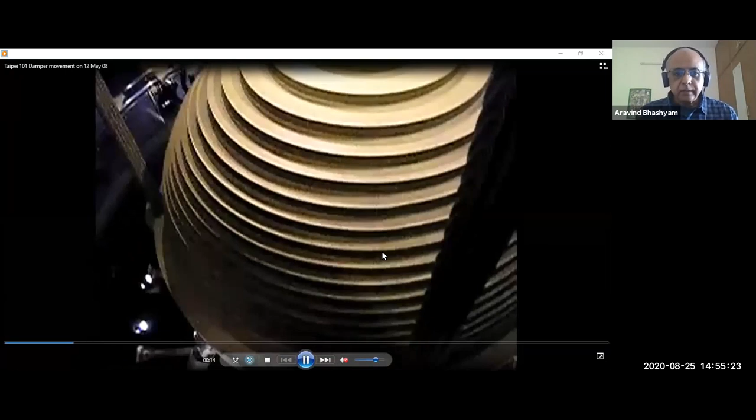Again, I understand in the year 2016 they had a typhoon that reached the design speed of 130, 138 miles per hour, and the building withstood that typhoon because of the presence of this mass damper.

Now basically, when it starts oscillating, it's absorbing the extra energy that is put into it, and it dampens. People moving around it will not be able to feel that it is being subjected to an earthquake or experiencing a high typhoon. So that's the beauty of this.

So that's it. Thank you. Any questions from your side?